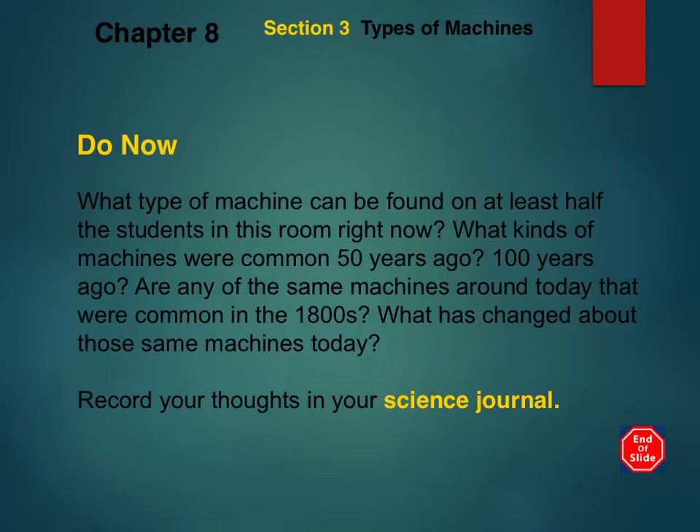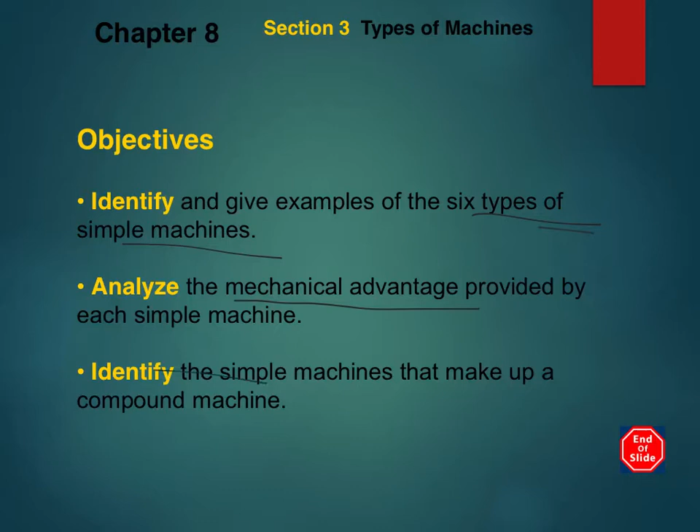So we're going to look today at 6 types of simple machines. We're going to talk about the mechanical advantage provided by them, and then talk about compound machines at the very end. All right, so we're starting with the lever, jumping right into it. The lever is probably the most simple and most commonly used simple machine. It has a bar that pivots at a fixed point called fulcrum.

All right, so the fulcrum doesn't have to look like this. Don't think they always just look like a triangle, but it does work as that. Okay, so that fixed point, the fulcrum, is key. So there's three types of levers. The first class lever, the fulcrum sits between the input force and the load.

So just to review, guys, remember input force is the force that you do on the machine. So that would be, in this case, pushing down here on this kind of seesaw-looking thing. And the output force is the force that the machine does on an object, okay? So with the first class lever, the fulcrum is between the input force and the load. Now, when I say load, I mean the weight or the object you're doing the work on right here, okay? So here you can see the fulcrum is in between that, all right?

So the closer the fulcrum usually is to that load, the object has a mechanical advantage greater than 1, all right? When the fulcrum is exactly in the middle between the input and output force, we'd say the mechanical advantage is exactly 1. And when the fulcrum is closer to the input force than the load, we'd say the mechanical advantage is usually less than 1. So that placement of the fulcrum is the key difference between all these different levers.

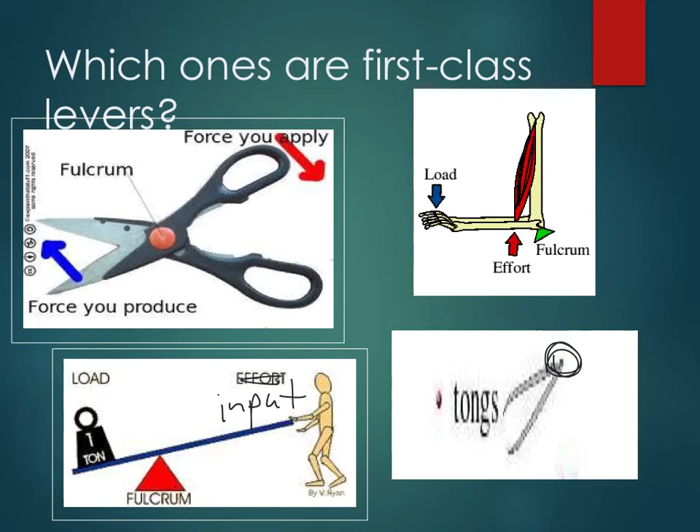Input force right here. Second class levers, and with this one, the load is between the fulcrum and the input force. So here you can see how the fulcrum has moved here. Okay, in this second class lever, the output force or the load is between input force and the fulcrum. So the second class lever usually always results in mechanical advantage greater than 1. So obviously you can see the wheelbarrow as an example. Opening up a bottle of soda is the same. Also takes advantage of that mechanical advantage.

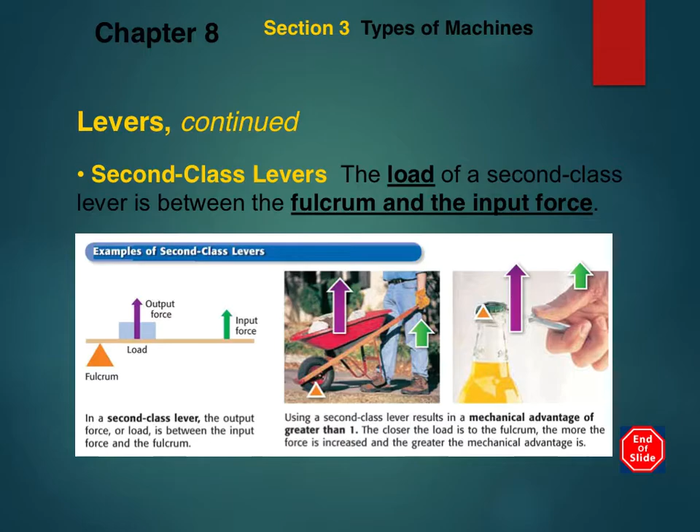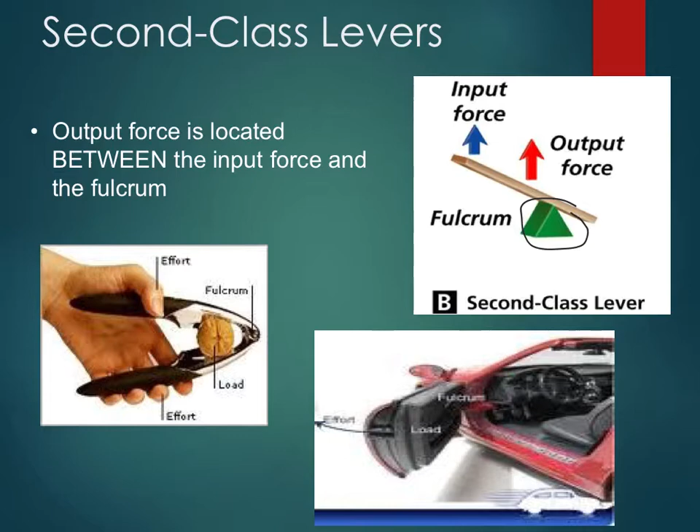Right. More examples of second class levers. You can see those nutcrackers again. Here you can see how the fulcrum is positioned here, the second class lever. The car door swinging is another example of a second class lever. Okay.

The wheelbarrow, when you lift the handles of the wheelbarrow, it rotates around its fulcrum. All right, so the input distance is greater than the output distance. So the increased input distance means it takes less force for you to lift the load. So the second class lever always results in MA or mechanical advantage greater than 1. All right, so that's why you can put such a heavy weight here, right? Because it's increased that distance.

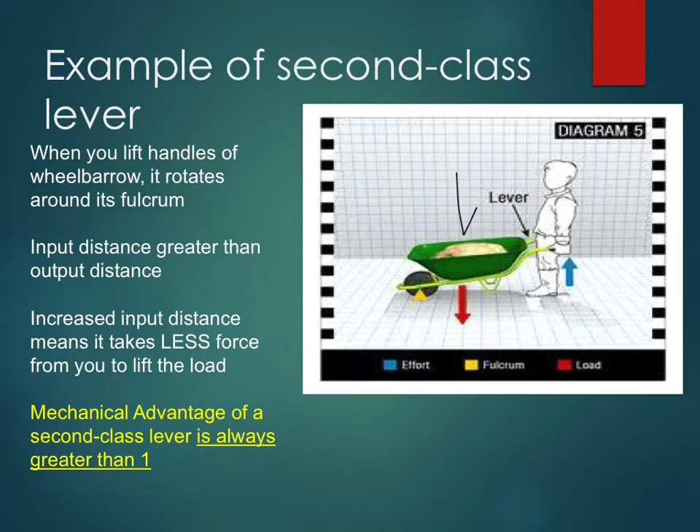Third class levers, the input force of a third class lever is between the fulcrum and the load. So here's the input force, is the work you're doing on the object. It's between fulcrum and the load this time, right? All right. Okay, so this results in mechanical advantage less than 1, all right, because the force is decreased. So the third class levers increase the distance through which the output force is exerted.

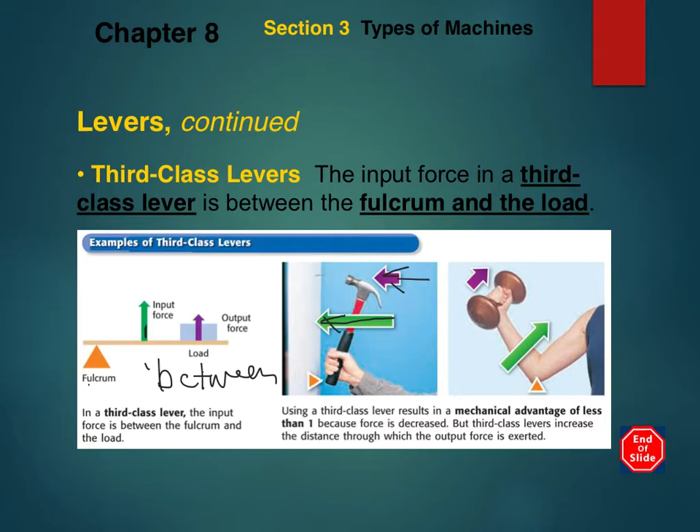So, when you're lifting weights, you don't want it to be too easy, right? So you want the mechanical advantage to be a little bit lower. When you're swinging that heavy hammer, you've increased the distance you're moving the output force, and your input force is always a little bit lower here, okay? So just remember the third class levers give you a mechanical advantage less than 1.

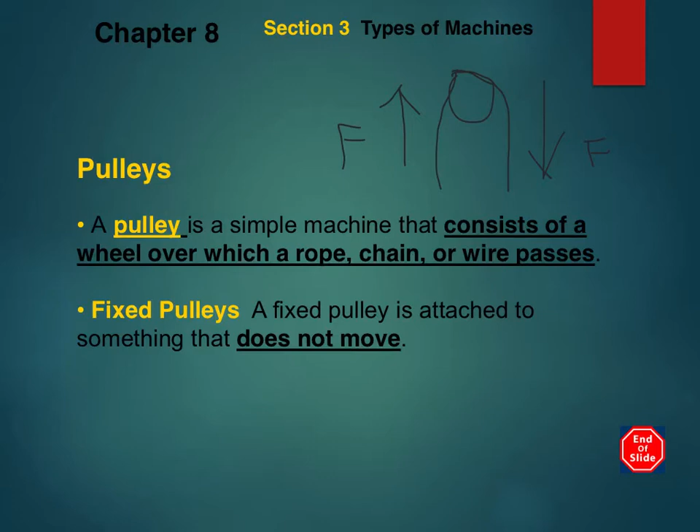A fixed pulley is attached to something that doesn't move, right? So your flag has a fixed pulley on it. You're pulling on the flagpole. A movable pulley, unlike a fixed pulley, is attached to an object that's moved. Okay, and finally the last one, when a fixed pulley and a movable pulley are used together, the pulley is called a block and tackle. So to review, we've got fixed pulley, movable pulley, and a block and tackle are the 3 types of pulleys.

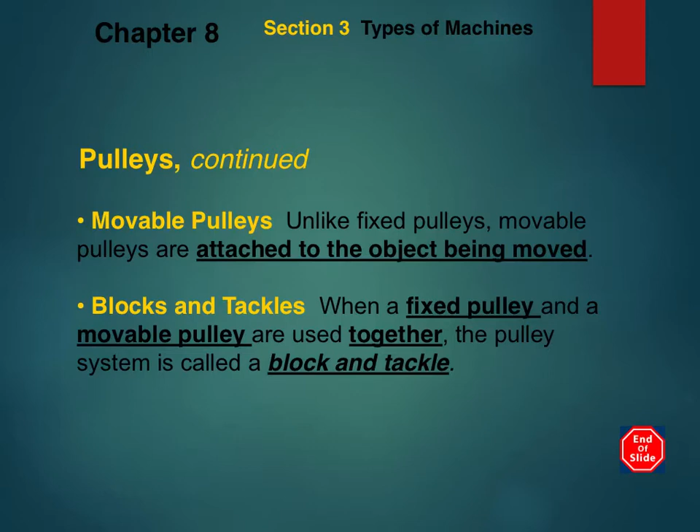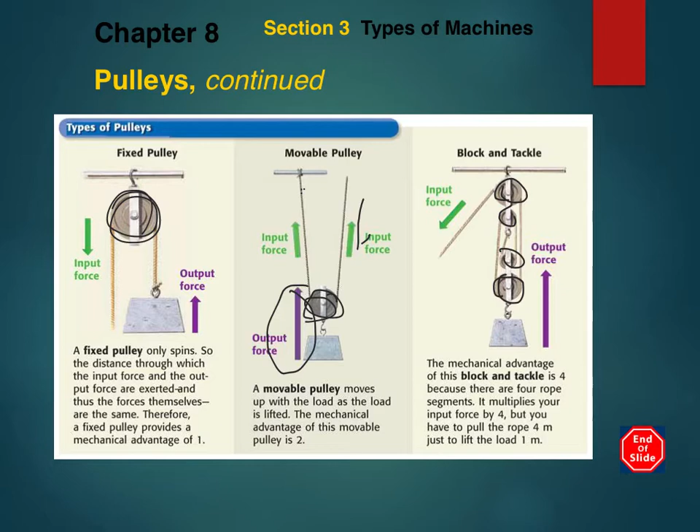Now, when you add another pulley, it kind of makes sense, right? So the mechanical advantage here would be even greater. So these pulleys are spreading out. Remember, they spread out the force. Imagine the force is just wrapped all along these wheels here. So we're just continuing to spread it out and do less work yourself. So you can lift something quite heavy by using the block and tackle pulley. All right, and it multiplies the input force by 4 this time.

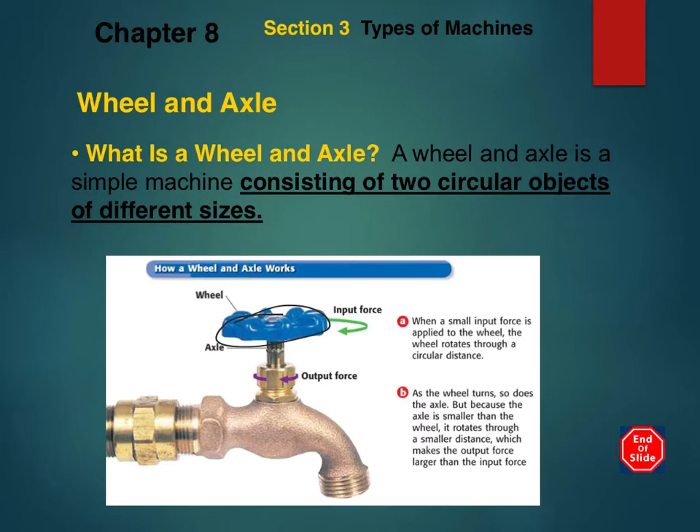All right, a wheel and axle, super common. A wheel and axle is a simple machine that consists of 2 circular objects of different sizes. So in this case, the axle is one circular object, and the wheel up here is the handle, okay? So you can apply a small force to the wheel, and it rotates around the axle. So as the wheel turns, so does the axle, but because the axle is smaller than the wheel, it rotates a smaller distance, which makes the output force larger, right? So if you make the distance a little smaller, you increase the amount of force.

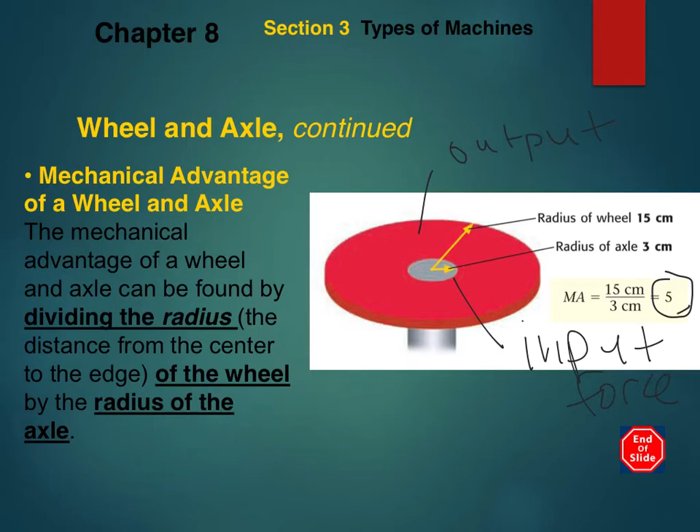You take output force and divide by input force, but you just need to think about these 2 as each, right? So this would be the output. Oops. And this is the input force, okay? And if you think about it, you are exerting work on the input force, okay?

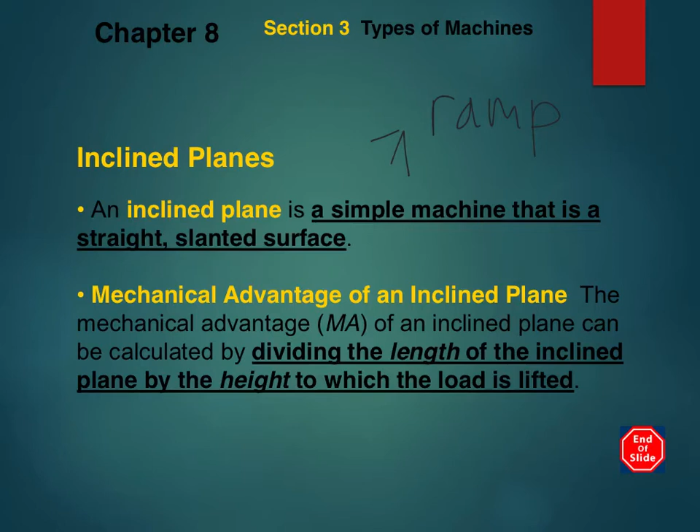All right, so an inclined plane, AKA kind of like a ramp, really, is a simple machine that is a straight slanted surface. So the mechanical advantage of this can be calculated by dividing the length of the inclined plane by the height to which the load is lifted. All right, so it's pretty easy. You're taking the length and dividing it by the height. So if a heavy box is pushed along a ramp that's 4.8 meters long and 1.8 meters high, you can find the mechanical advantage by just dividing. So this lets us see how helpful a ramp is as you are trying to move an object.

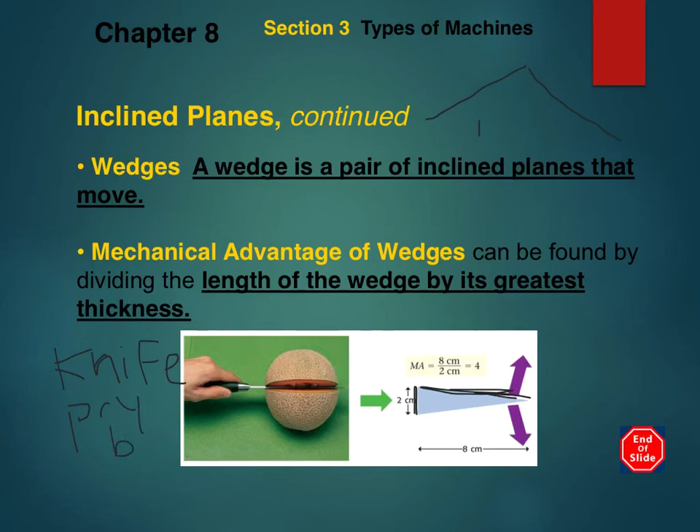So if you look closely at a screw too, it's essentially just a ramp that goes around the screw. So the mechanical advantage of screws: the longer the spiral in a screw is, and the closer together the threads, which are sort of like the spiky things on the side of the screw, the closer those are together, the greater the mechanical advantage is. So it's almost like the tighter the screw is, right?

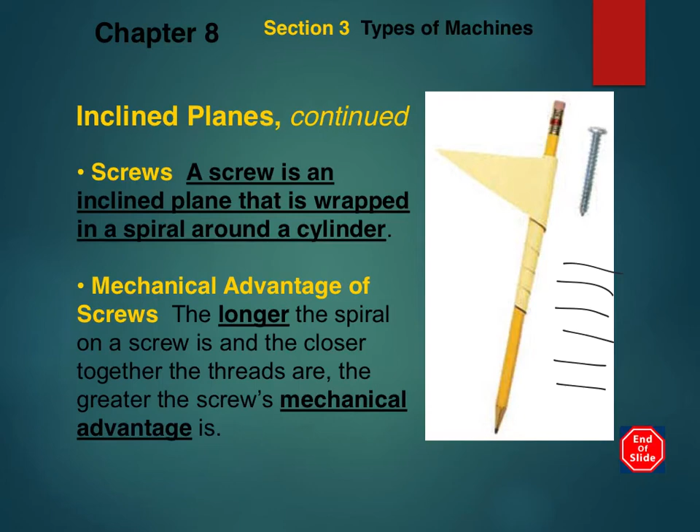So compound machines are the last thing we're going to talk about. Really simple. You guys know what compound means. Like compounds, when we talked about chemistry, were 2 elements kind of bonded together. If you take a compound sentence, right? It's 2 ideas kind of mushed together. Same thing. Compound machines are machines that are made of 2 or more simple machines.

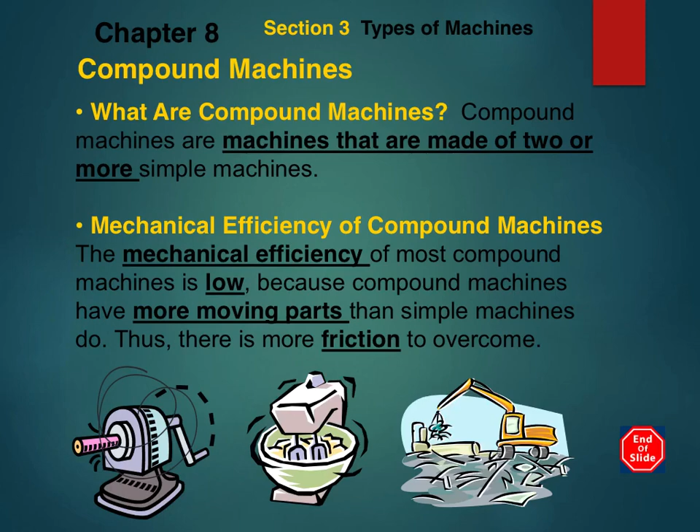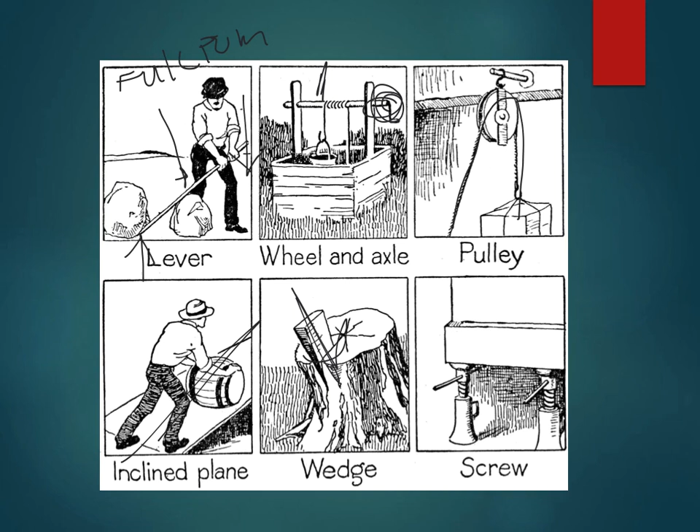The inclined plane is the ramp. You can see the wedge here. Actually, hey, they're all in order, aren't they? And you can see the screw, which is essentially just like an old school, what do you call those things? The jacks you jack your cars up with, okay?

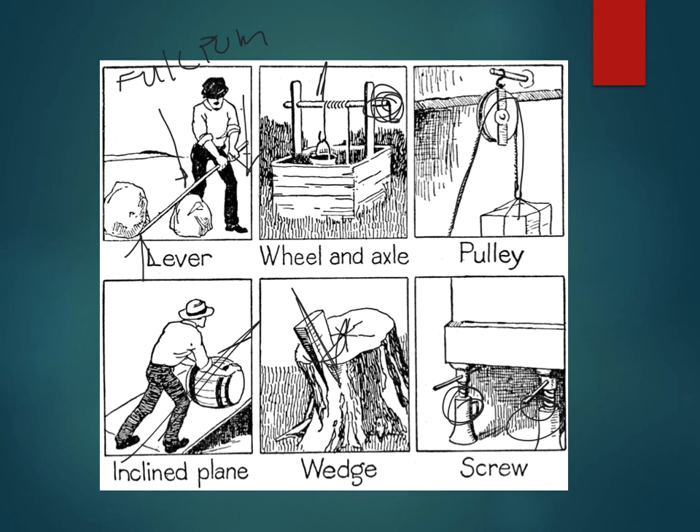All right, cool. Well, study these notes. Know them really well. We're going to have a short quiz when you come back to class. That would be either Friday or Monday, depending on what class you guys have. And don't wait to start studying. Start studying Chapter 8 now. Some review materials are coming out to you soon, but don't wait for them. Start studying now. Have a good night.